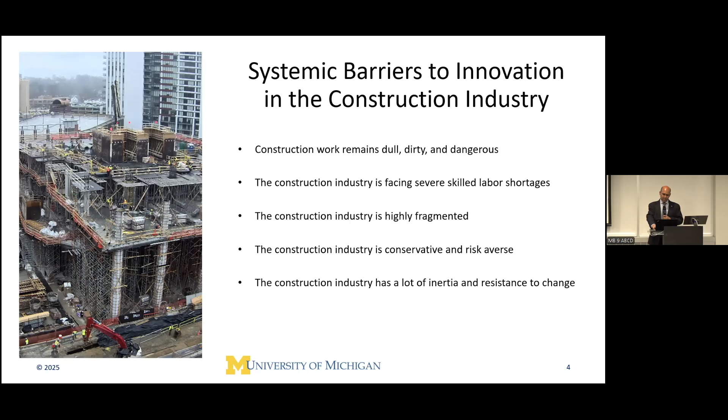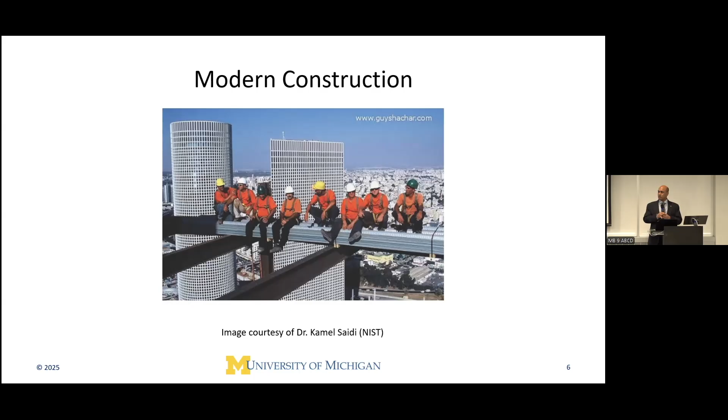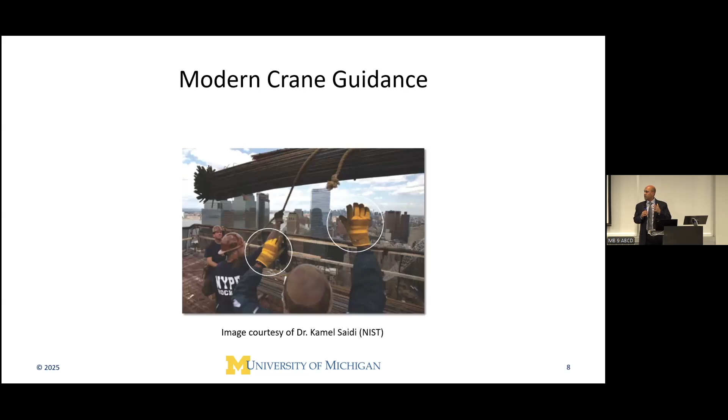If you don't believe there is inertia in the industry, I'd like to share a few slides courtesy of my colleague Kamel Saidi at NIST. Most of us have seen this picture as a poster somewhere—this could be a building in Montreal right now. Not much has changed in how construction is performed. This is how a crane was signaled maybe decades ago, a century ago, and this is still today how you'd see a crane moving around on a construction site.

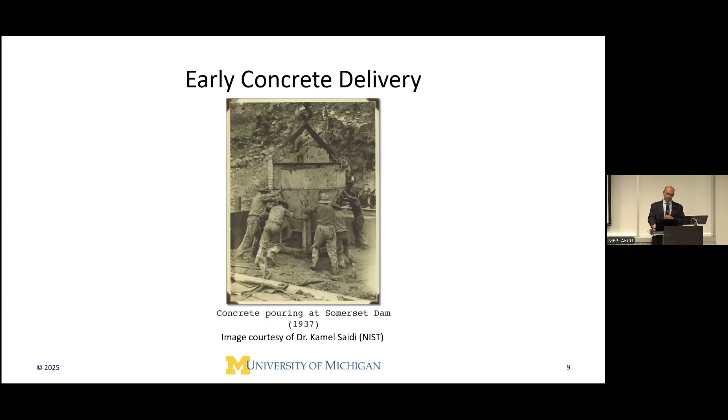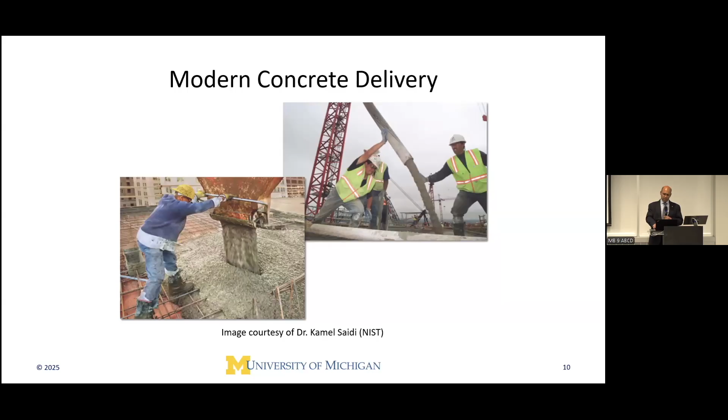This is how concrete was placed for a dam a century ago, and very likely the site we're visiting tomorrow as a group has a similar type of construction that put that dam into place. So things haven't changed much on the construction front, even though we now see a lot of energy from startups trying to introduce automation and robotics, particularly in on-site construction work.

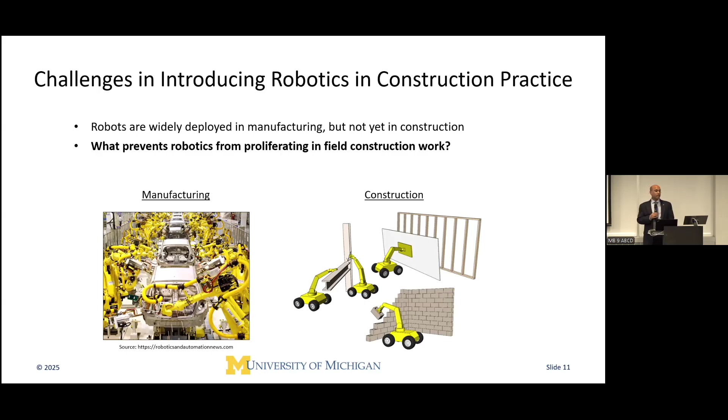With this backdrop, our main motivation for beginning work in this direction was that many people asked: in manufacturing, productivity is high, safety has gone up, partly due to robotics—why not in construction? What prevents robots from proliferating in field construction work in particular? Over time, we developed our own picture as to why this is exactly the case.

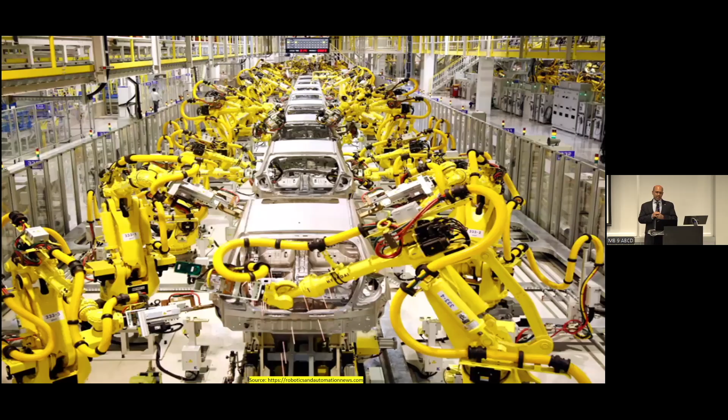I'll summarize maybe 10 or 15 years of understanding in one or two slides. The main reason is that a factory setting, a typical manufacturing environment, is a very controlled place where the metrology—the ability to locate a robot at sub-millimeter level—is practical and possible.

The work done is organized in a paradigm called process interaction, which means the robots and the workers stay where they are, and the work-in-process inventory comes to you. You add value, and the inventory moves forward.

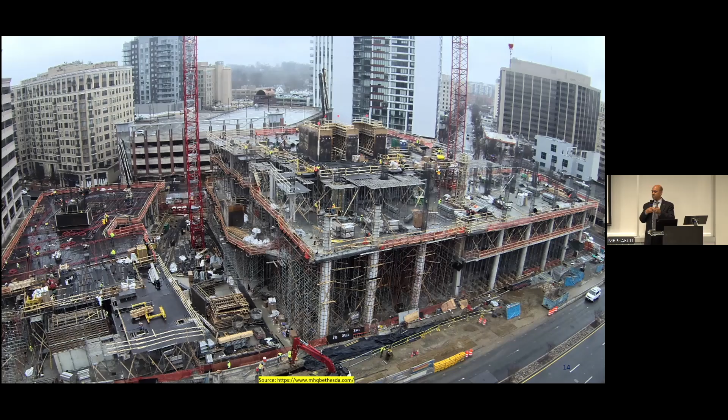Compare that to a construction site. Other than what some might construe as visible chaos, not every construction site is chaos—people know exactly where things are. But the key point that differs in organizing construction work compared to manufacturing is a paradigm called activity cycles. For on-site construction work, the work doesn't come to you. The resources, the people, machines, tools, components have to go to the place of work each time they add value in that environment.

With this basic understanding, there are some key differences that serve up as challenges for robotics. Every project is unique, we know that, but many people say construction work is repetitive. We pondered over this, and in the work of one of our recent PhD students, we defined the term quasi-repetitive—yes, repetitive, you're going through the same motions, but no two instances of the work are exactly alike. A crew might install hundreds of windows or doors, and that could potentially be robotized or co-robotized, but no two instances are going in the exact same place in the frame. The location is changing, the geometry is changing, the floor is changing, the rough carpentry around it is changing. So each circumstance is different, and quasi-repetitiveness creates a lot of challenges.

The environment itself is at best rugged, cluttered, and constantly moving. We call this an unstructured environment, particularly in the context of robotic construction work. In terms of tolerances, things in a factory are often at sub-millimeter level precision, but on construction sites, even in a modern building, if you look with a fine-toothed comb, not everything is exactly where the BIM says it was. Oftentimes it could be a few inches apart, and none of us care because the form and function generally look the same. But from a robotics perspective, it matters quite a bit how you add value with this level of tolerance stack-ups.

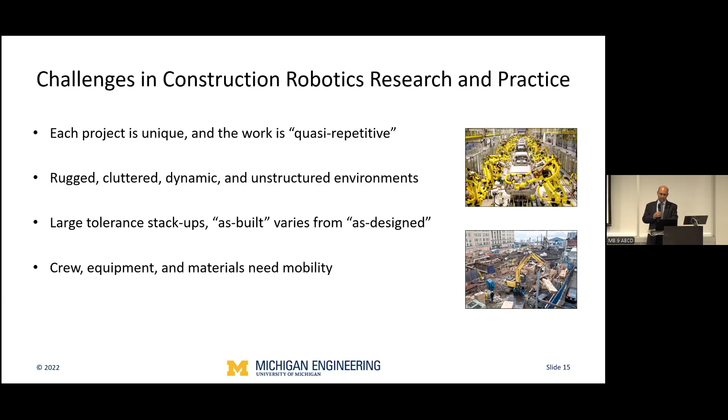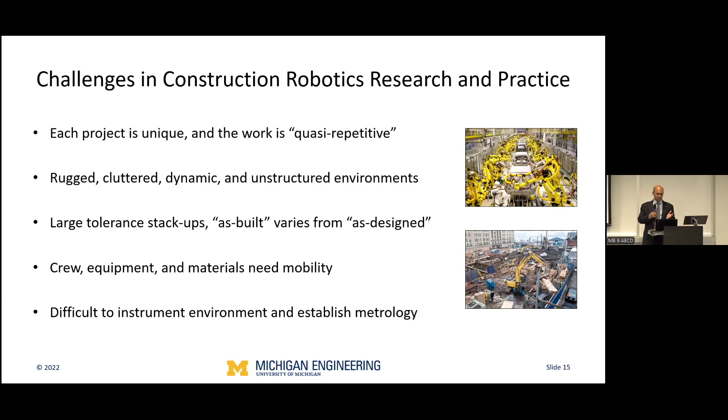Because of activity cycling, the crew, equipment, and materials need mobility, and mobility is a very big challenge in high precision robotic work. Last but not least, related to mobility is the fact that each time a robot moves, you have to set up a high precision metrology—a way to let the robot know where it is relative to the construction site around it. These are some key challenges we've identified over time as being the key impediments to wide proliferation of robotics in construction work.

Based on this, I'll give you a quick introduction to how this evolved into a research roadmap for us over the course of several PhD students' work. The basic premise is that any mobile autonomous robot can have three functions: the ability to sense an environment, the ability to think or reason about what to do next, and the ability to physically perform that action. We call that sense, think, and act—probably figure one in most robotics textbooks.

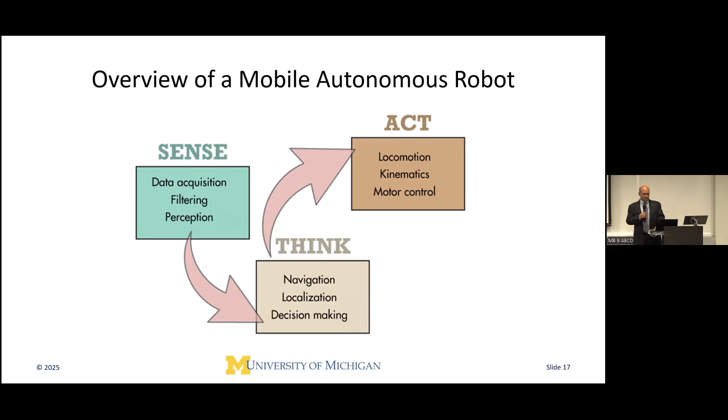Many years ago, in one of the IAARC's publications—I don't remember the exact name—I had seen this idea broken down into a three-axis diagram, where one axis says planning, another says cognition, and the third says physical. The notion is that for any piece of construction work, you have to plan how you're going to do it, including any improvisation when things don't go per plan. You have to be cognizant of what is in front of you and make decisions on the fly. As a human, we do this interactively without making it a formal process. Finally, once the two come together, you're going to actually do the physical work.

If a human does all three aspects—planning, cognition, and physical—then you're talking about manual labor. But let's say the human does planning and cognition, while the physical part is done by a machine—then you can think of it as a typical construction equipment, like a bulldozer or an excavator.

You can also think of it as a teleoperated robot, because you're doing the planning and cognition as a human, and commanding the physical work of a robot.

Given all of these challenges that we identified earlier, our main focus shifted into making robots more proliferated or practical in terms of adding value on a construction site. Can we move their abilities along these two other axes, the planning and the cognition? Planning and improvisation, even today with all AI and other technologies, still remains the domain at which humans excel much better than an AI agent or a robot. So our first low-hanging fruit was: can we make robots have more cognitive abilities, the ability to interpret a workspace and environment, and make it smarter to do that kind of work?

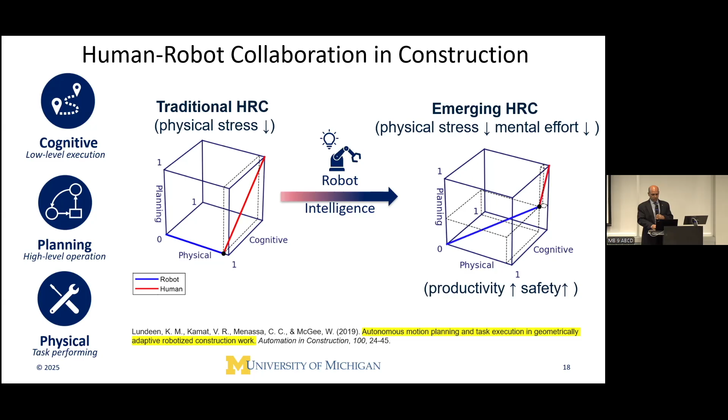Once we had success in this work, we began to realize that what the human can do and what the robot can do, and what each entity or agent is best qualified to do in a piece of construction work, lies on a spectrum. It is not just one point of distributing responsibility. And that spectrum eventually led to this research roadmap, which we also called the ladder of human-robot collaboration.

The chief architect of this was my PhD student, Ci-Jyun Liang, who is sitting here at the back of the room, and is the first author on this paper.

The idea here is that the first rung of the ladder, pre-programming, you can replace with teleoperation of a piece of construction equipment. So the human is doing the planning and the cognition, the machine is doing the physical work. But as you start climbing up this ladder, the robot is doing more and more of the cognition, all the way to full autonomy, where the robot is doing the planning, cognition, and the physical work.

I should say upfront that the top rung, full autonomy, is just a theoretical concept, and I think it will remain like that for a long time, at least the way construction is today. But just for academic completeness, we have it staged like this. So over the years, we kept on working along these rungs of the ladder.

As I mentioned, the next work, done by Ci-Jyun Liang, focused on this concept called imitation learning, where we tried to explore whether we can make a robot learn how to do construction work by looking at other workers doing it. With time, that was further expanded by a few other PhD students, including Somin Park, who is here, where they introduced the ability to have a construction robot in a process-level digital human-in-the-loop digital twin, where human and robot can work together to improvise, and the human can supervise the robot to add value to construction work.

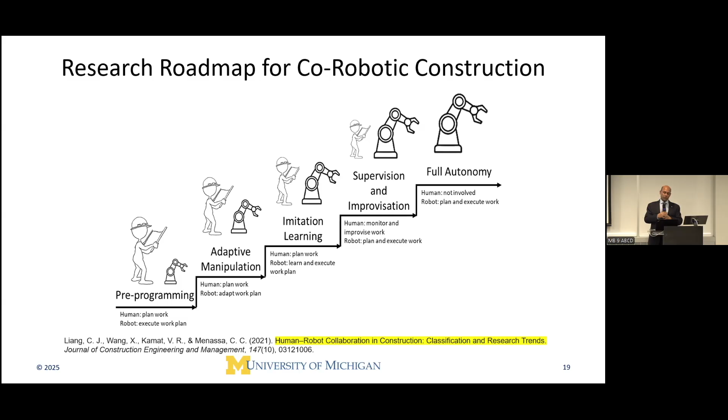So that's how we progressed in this work. I'll just give you an example of how all of that came together in one particular study.

Before that, I'll just introduce briefly our lab environment at the University of Michigan. One of the things we have always tried to do, even though it has been extremely hard to bridge this gap, is work with full-scale physical robots, because many times the gap between having a successful algorithm run in ROS or Gazebo or in any other kind of simulation, and then making it work on a real robot — that so-called ditch of death — is very, very wide.

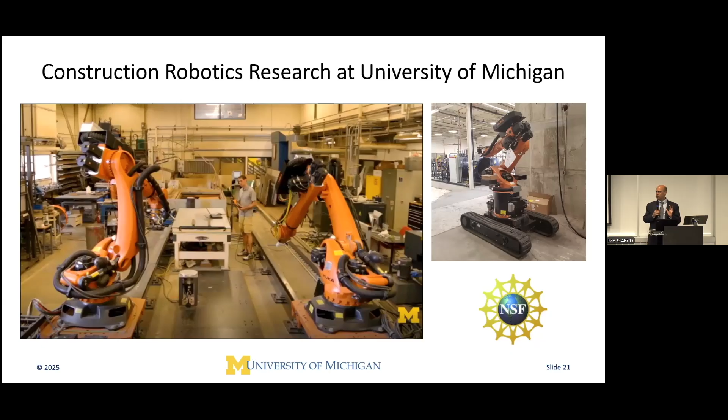You never know what you'll come across when you're trying to bridge that gap, because simulation and reality, there's a lot of difference, particularly at full-scale robots like this. Even in departments such as computer science or robotics, many state-of-the-art algorithms are tested at a smaller scale with tabletop robots and so on. But in construction, I think it's very important that we test things at the full scale like this.

One of the things that we have worked on is to recreate this notion of how human workers learn from other human workers — there is this notion called master-apprentice. Even in today's context, let's say in the US — I'm assuming Canada and other parts will be similar — a novice worker first goes to trade school. He or she learns the basics of electrical, plumbing, fitting, and so on.

Then they are paired with a master craft worker who is working in the field and become their apprentice. Over time, they observe the master craft worker, learn more and more from them, get more and more responsibilities, and eventually graduate to becoming a journeyman, as it's called in the US, to becoming an independent craft worker themselves.

So could we recreate that kind of learning mechanism between human-robot teams? As step one, what would be needed for a robot to observe a human doing this kind of work and be able to repeat it in a different place, different context, different setting? That was the basic premise of this work.

Over time, we have experimented with many different things to replicate how humans work. I'm sure all of you have some experience—something is broken in your house, you look at some YouTube videos, some IKEA videos, and try to fix it. So our one line of inquiry was, can a robot observe some construction videos and just learn from those whether they can get some state spaces of how to do construction work?

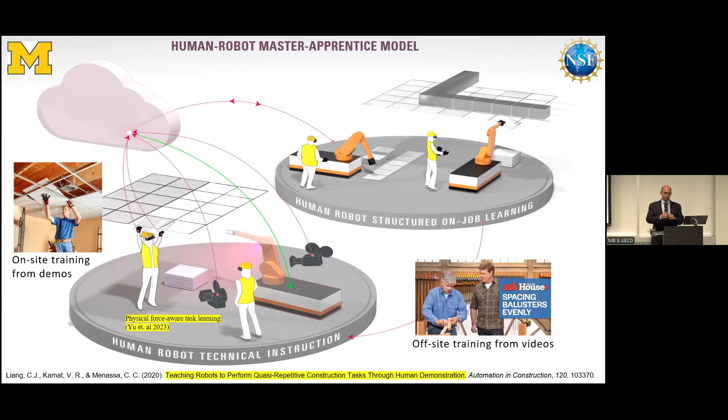Another PhD student, Hongri Yu, who is now at Virginia Tech, did some work in this regard. Similarly, we also developed the ability for a human to demonstrate in VR rather than in the physical world, because arguably demonstrating in VR is much less physically strenuous. Once the human demonstrates in VR, there is the ability to parameterize it and create several different combinations in VR without the human having to necessarily move the joysticks and other controllers.

Following this, or in parallel, we also developed a way to organize or break down construction work into low-level tasks or subtasks. Those who may have studied the performance of work deeper than we have know that you can break down work all the way to elemental motion, and then into which muscle fibers and so on—there is sufficient depth at which you can study the breakdown of work.

For us, we were only interested in the elemental motions—what is the lowest level elemental motion that can be taken as a building block. And with those building blocks, you can concatenate or chain them together to create any kind of construction task.

So any observed task can be broken down into a chain of observations, and it gets stored in the cloud using this hierarchical taxonomy. Once stored in the cloud, other sites, other locations, other robots, other agents can access this information and adapt it to a different geometry in a different place.

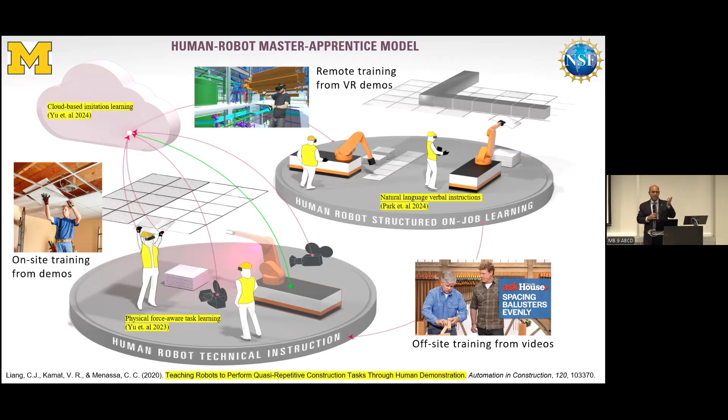So if you give these types of instructions, the interaction becomes much smoother. And Somin did quite a bit of work in that regard as well.

So all of these things came together in an AI-powered co-robotic workflow that not only lets robots learn by observation, but also lets a human be part of a process-level digital twin where the robot knows what it is supposed to do next. It can show the human worker what its plan is.

The human can help it improvise, and then the robot proceeds to do what is next. So it becomes like a true human-robot partnership with these four elements: real-time digital twin, hierarchical imitation learning, natural language, and VR interfaces.

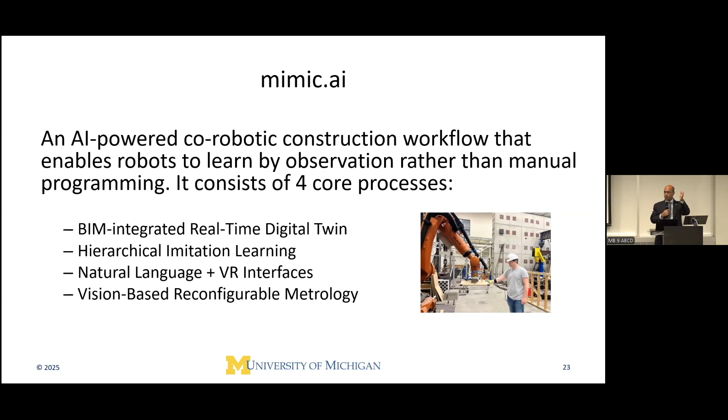And all of this is possible because very early on, we developed the ability to position and orient robots very accurately using computer vision methods, so that there is a mobile, rapidly deployable metrology. That work was done by my first student in robotics, Chen Feng, who also happens to be this conference's best paper awardee.

So this is just a side-by-side picture of how all of this comes together. I may not play all of it now, but what we have here is, on the right, a digital twin that is like a sub-millisecond representation of what happens in the real world. As clearly the real world robot moves, it is represented in the virtual world as well. But what is important as a feature in this environment is there is interactivity between the human and the robot.

And once the human declares their intent or instruction, the robot will first make a plan and demonstrate it in the virtual environment. And only when the human is happy with what is going to happen next will they give the robot a green instruction to perform it in the real world.

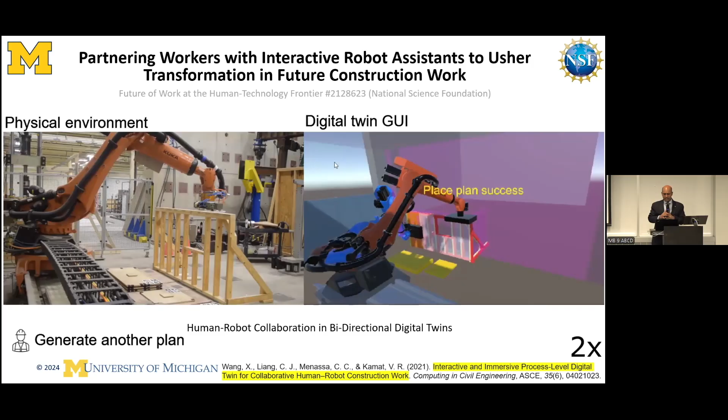So now the robot, the blue one is a virtual robot, is demonstrating what its plan is in the virtual environment. And this work was primarily done by another of our PhD students, Xi Wang, who is at Texas A&M University right now.

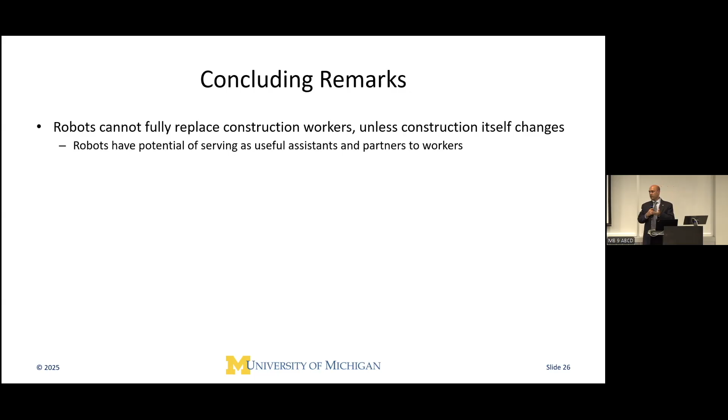But robots do have the potential of serving as very useful assistants and partners to workers. And as a research community, not only should it be our goal to develop newer concepts and newer algorithms, but also to try to identify an industry where there is value to be added, what type of tasks are best suited for automation, and what results in improved profitability for our industrial partners, and so on.

Talking about technicality, human workers are really good at planning, sequencing, improvising, and thinking of multiple things at the same time. Robots are generally good at precise motion control and repetition without fatigue.

So when we talk about the research framework I showed earlier, in any robotized or prospective robotized construction task, it should be thought about carefully what role you want the human workers to play, what role you want the robot to play, and give each agent what it is best at doing so that the task becomes a success.

And historically, robots, when you think about robots, you think of a teleoperated robot or a pre-programmed robot. And hopefully I've given you some perspective on why this is challenging in on-site construction work.

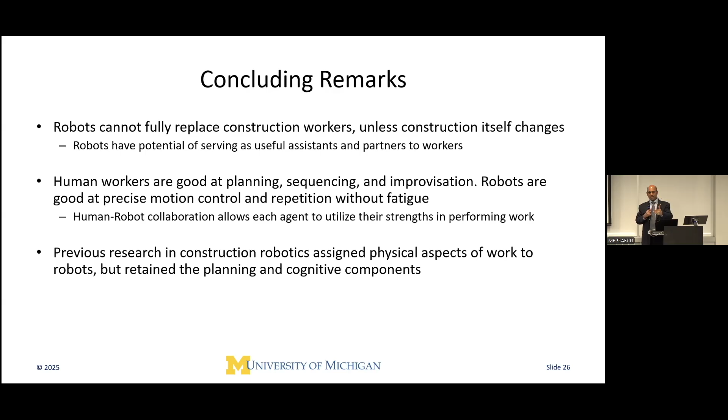Historically, the challenge has been that human workers always wanted to retain all control except the physical part. But it is very difficult to teleoperate or pre-program a robot to do most construction work.

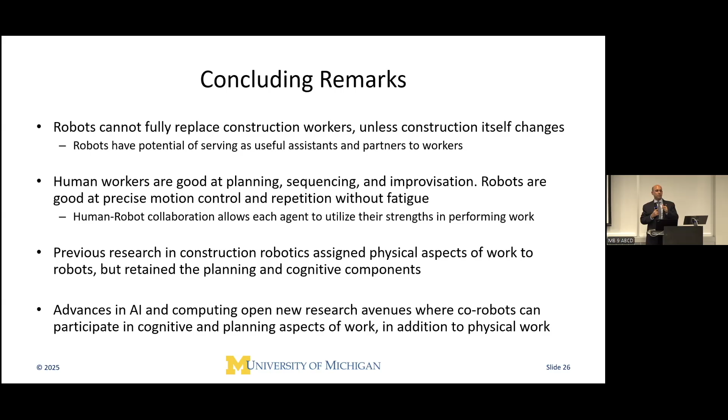So I think that's why the advances that are going on now in computing, and more recently AI, open up new research avenues where co-robots can take on more responsibility, not only along the physical line, but also the cognitive line, and maybe someday along the planning line as well.